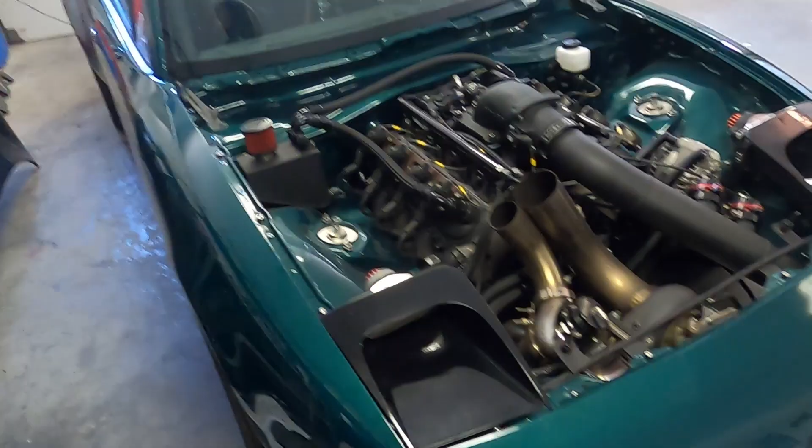You know, we made 25 hits on the dyno, made 3 passes at the track, and we found a few things that were flawed, but nonetheless, nothing that we can't fix. So I have a couple things on this I've written down. Got to fix the starter wire.

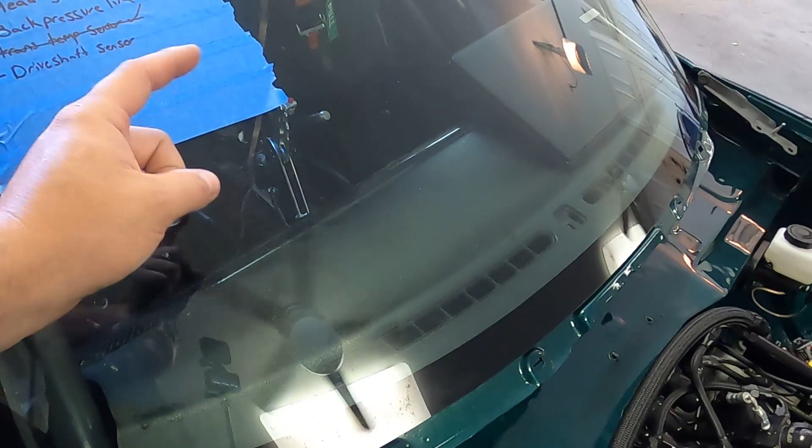I have a wire that goes from a switch panel into the shifter. The shifter only allows the starter signal to go through if the shifter's in park or neutral. That way it's a neutral safety switch. And then I have the wire that goes straight to the starter solenoid. Well, I think that wire is too small.

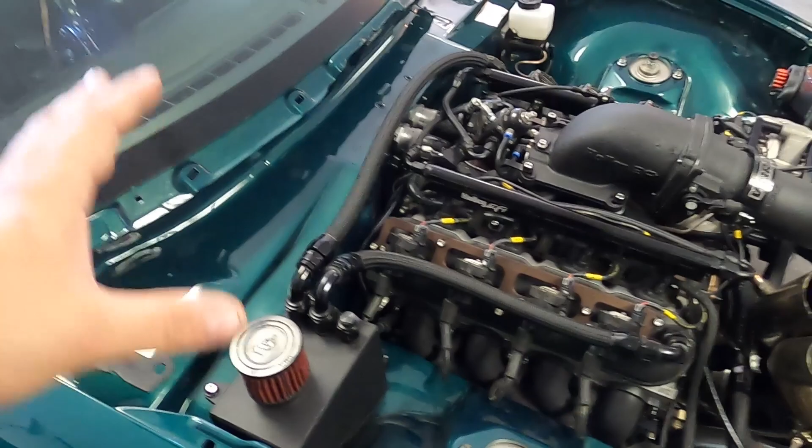So what I'm gonna do this weekend is we are going to take that wire, go into a relay, and then we're going to use a relay to send a stronger 12-volt signal to the starter. So that's that. The second one's head gaskets. I'll explain that in a minute.

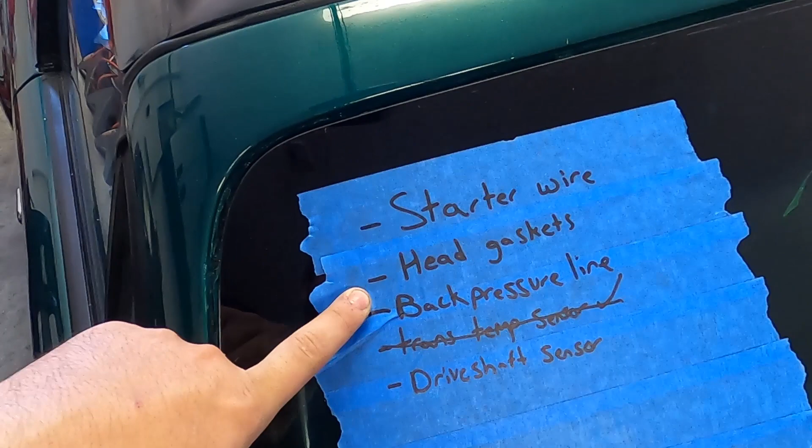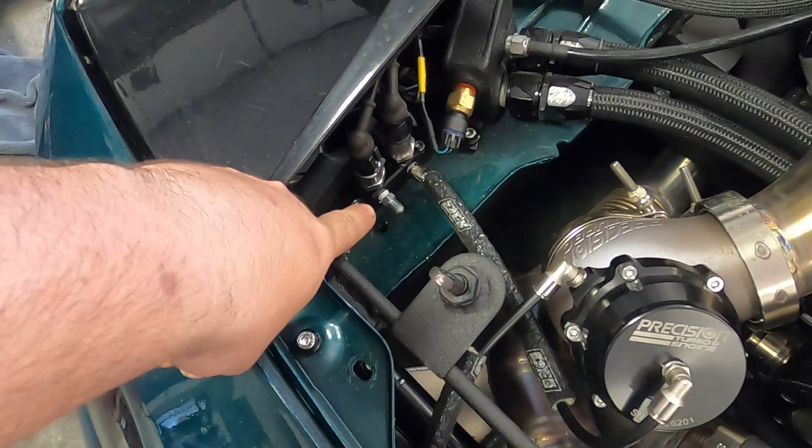The back pressure line, that's a funny one. I have it removed off the car now, but there's a line that goes to the hot side of the turbo. My dumbass made the line out of the copper nickel brake line I use, but I used an aluminum fitting. Not even thinking about it, I did it. On the dyno, I noticed it was a little wiggly. We go to the track, after the first pass, it was a little wiggly. After the second pass, the nut was gone.

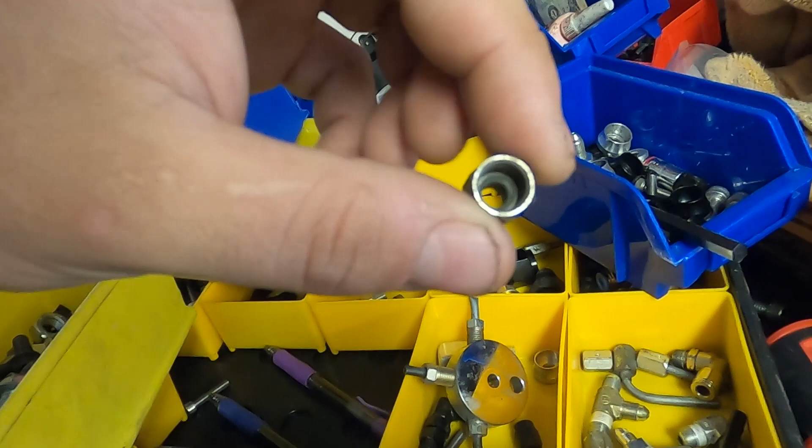I explained before how to make a brake line, but you have to have a flare sleeve and then a nut. I'll show you. Like here, this is what's called your tube sleeve. And then this is what's called your tube nut. So basically you have to have the nut around the sleeve, and you can see how it comes through the back there. Whenever this is tightened, the sleeve makes connection with your fitting.

Well, the nut was gone, like completely gone. It had melted, but the sleeve was still there. It was the most mind-boggling thing. I thought it was hilarious, but no worries. Apparently the copper nickel brake line didn't have any failure, so I'm just gonna remake that same line, just changing the fitting to a steel fitting. So that should alleviate that.

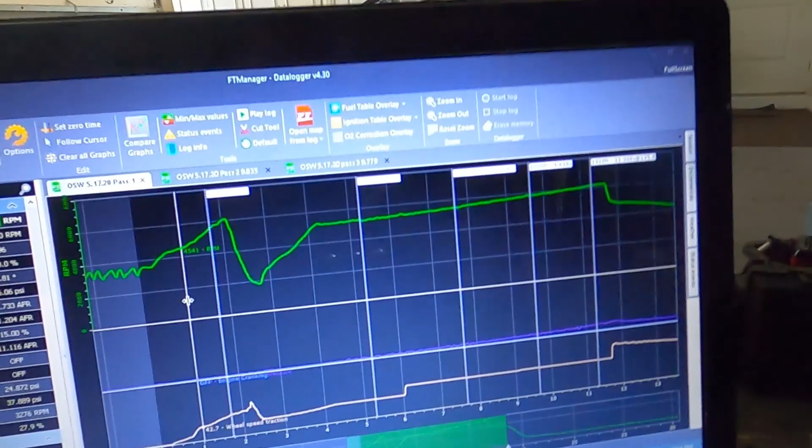I have marked on here trans-temp sensor. Well, come to find out, the homie Garrett at Fuel Tech told me that I just had the wrong calibration settings. So I adjusted that last night. I crossed it off my list.

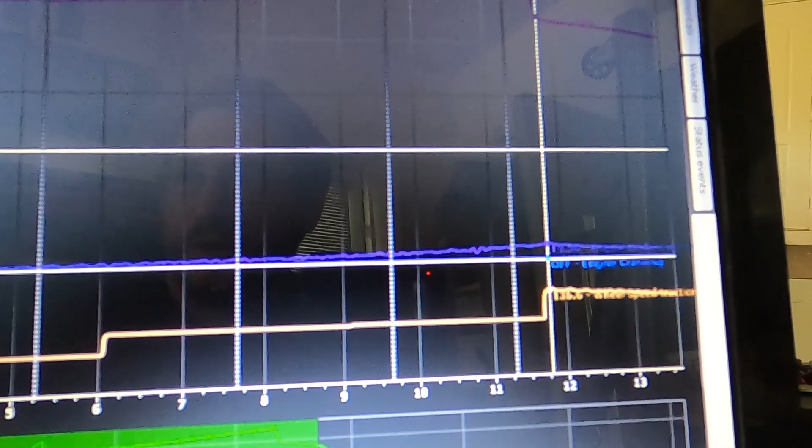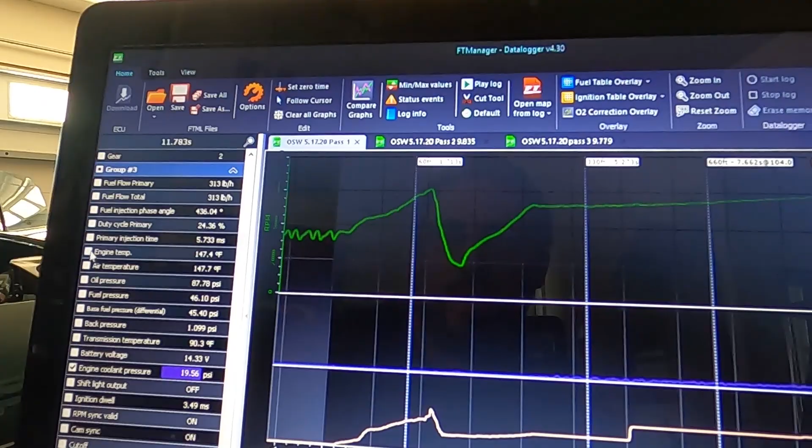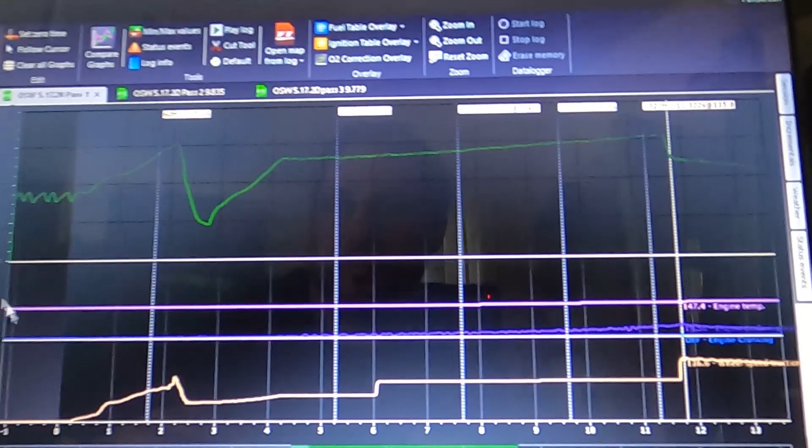Last but not least, drive shaft sensor. I did put a wheel speed sensor in the front right wheel, and I also have a drive shaft collar in the back of the car. Well, the ring is magnetic, and at the higher RPMs, or the higher frequency that it's spinning, it's actually getting a signal loss. So I need a different style trigger ring. I did order it. It should be here maybe this weekend. So I'm going to show you a couple data logs from the passes to explain why we need to dig further into more things this weekend.

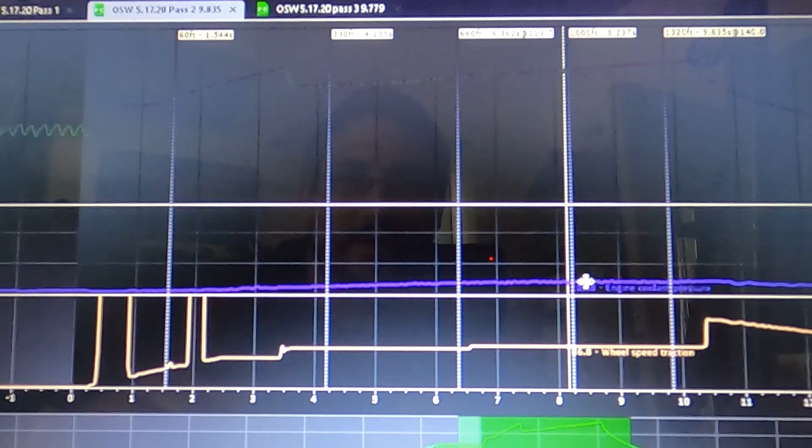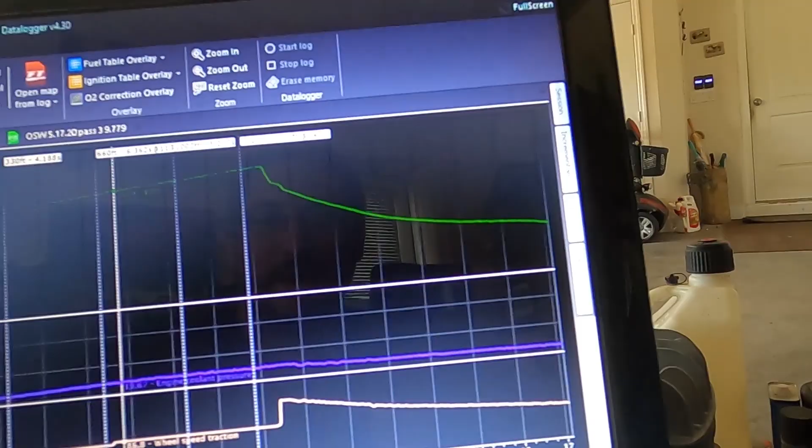Alrighty, so I got the Fuel Tech manager pulled up with the data logs from the 3 passes. I'm gonna explain this. I know not everyone wants to build a race car, but I cannot stress how comforting it is to have all the data in the world to actually look back and review everything. So I'm gonna show you 2 different parameters. This is a data log I'm looking at right now.

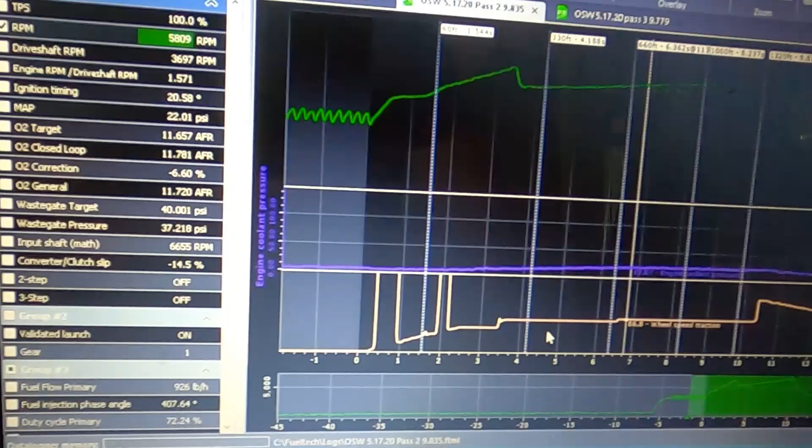Ooh, I gotta get you out of the, hold on one sec. Let's get you out of that glare.

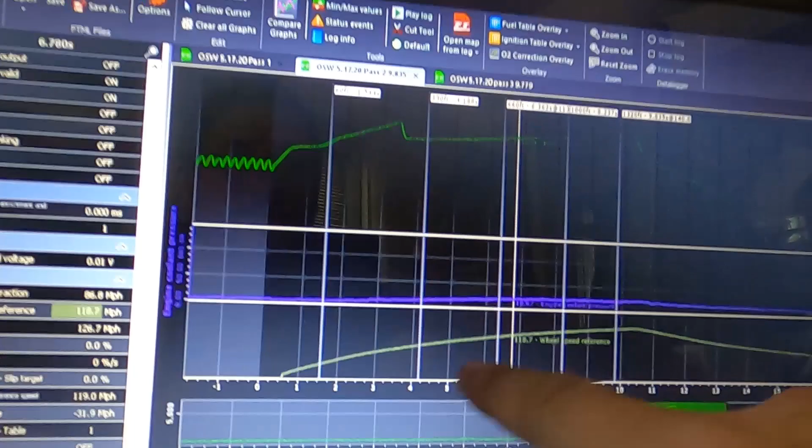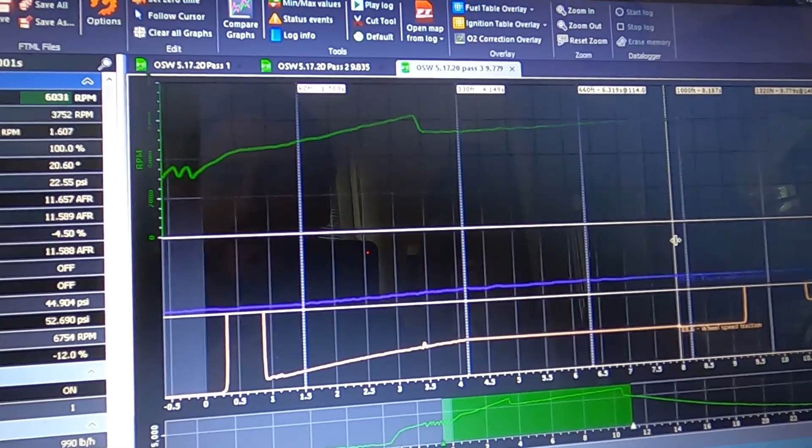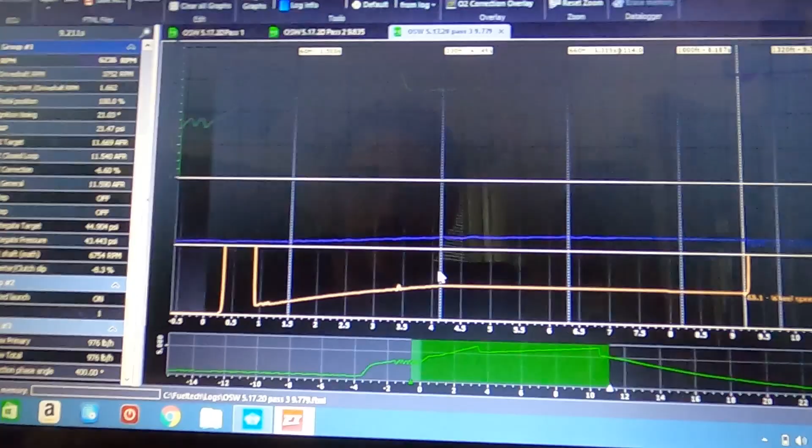Let's try over here. All right. Oh yeah, there's a lot less glare. Okay. So the green line here, squiggly guy up here top, that's RPM, just as a reference for me. I have this little purple blue line right here. That is going to be engine coolant pressure. So you can see there, squiggly guy. And then this bottom one is my drive shaft sensor.

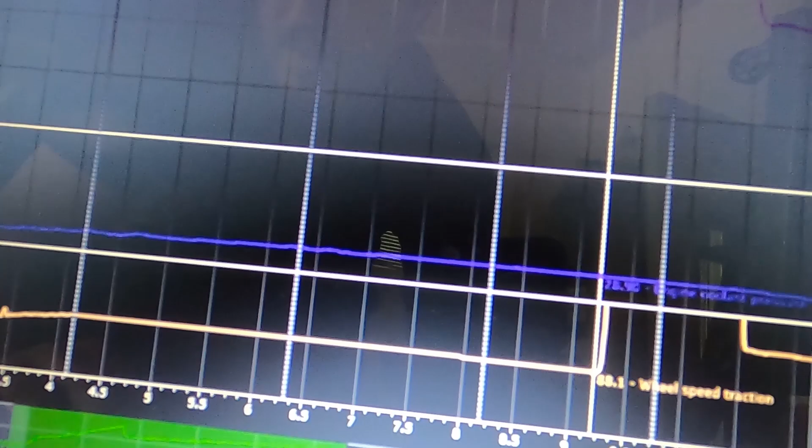So we already can see right here during the pass, you can see where it comes off the two-step. This is first gear. Second gear, it spins, it catches on the converter, and then it rides out second gear back out the back. So if we scroll through here, it looks like a peak coolant pressure of about 19.5 pounds, which is pretty high. So you can see during the run it increases.

Now, if we actually pull up engine temperature, you can see the engine temperature stays the same. So to me, that's telling me that something is forcing air into the cooling system. So that's bad. Now, if you look at this bottom squiggly, that's my drive shaft sensor. You can see here, it actually doesn't work. It goes here, it flatlines. I'm going to turn off that wheel speed, and I'm going to turn on the front wheel speed. Now on the front wheel speed, you can see how it just increases. So that's how it's supposed to be.

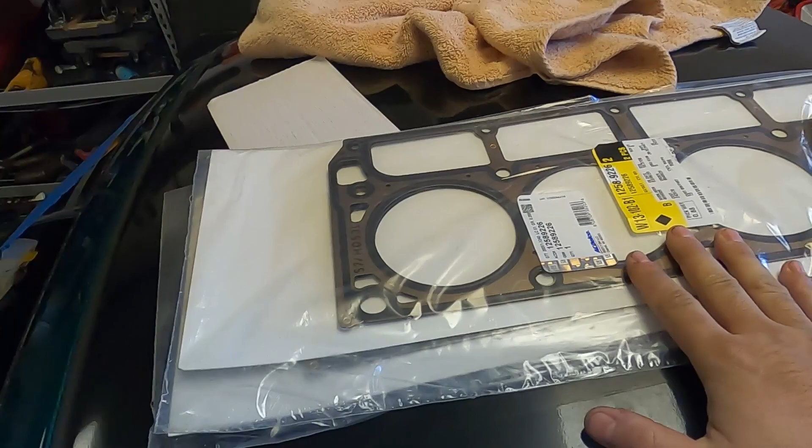Second pass, you got squiggly boys for the two-step. First gear, second gear out the back. Coolant pressure rises to about 21 pounds that pass, 22, 23 at the very end. Okay, so a little bit more than last pass. And you can see it increases, and then it'll actually decrease after the pass. So it is boost related.

Then you got at the bottom again the wheel speed traction. You can see that it actually rose here, it rose here. When the car actually made a good pass, the drive shaft sensor is all over the place. So again, I'm going to remove the rear traction and I'll replace it with front traction. And you see how it's a nice, steady line going up. So that tells me there's a false reading.

This is the last pass of the day. Coolant pressure peaks out around 29 pounds of coolant pressure up at the top. And then as far as wheel speed, you can see here, again, it cuts out before the 60 foot. And then at the very top end of the track, it just reads whatever. So let me go back down again. Let's replace that drive shaft with front wheel. And you can see the front wheel increases very nicely going down track. So I'm now learning the hard way.

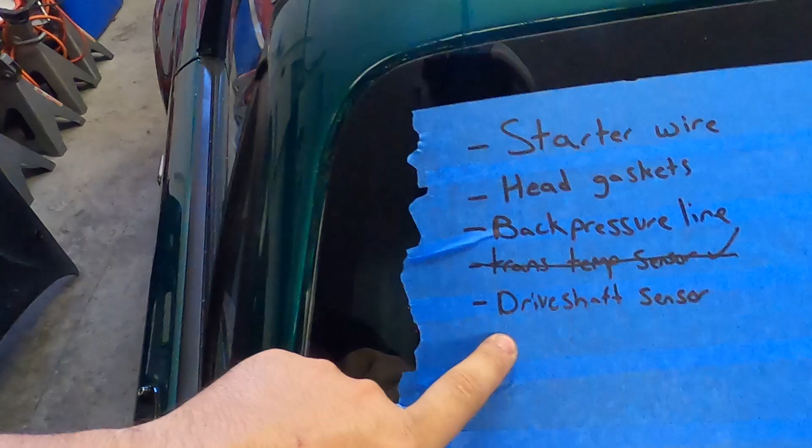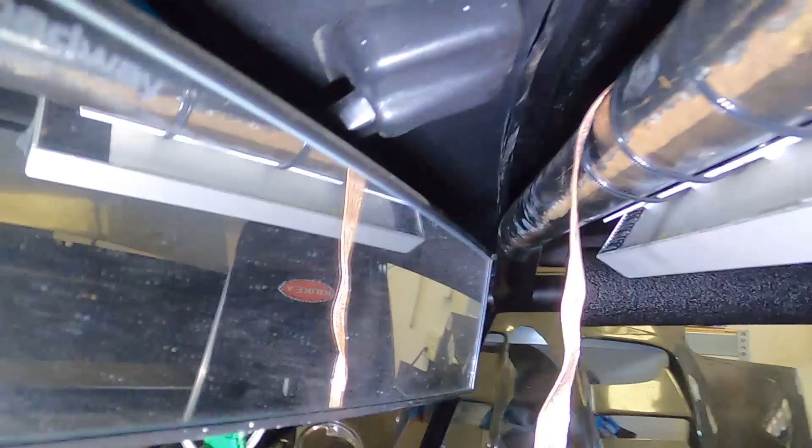So the pressure going into the coolant, I am 100% certain that's a head gasket. I kind of saw this coming. Brief explanation is I cheaped out on head studs. You see all these internet builds where this guy makes 1,000 horsepower on this, a guy makes 1,000 horsepower on that. Well, realistically, this car made 900 horsepower to the engine, and the Chinese head studs, they said goodbye. I know I have a different variable than others just because I do have significantly higher back pressure because of the small turbo. So that probably expedited the fact that I was gonna lift a head eventually.

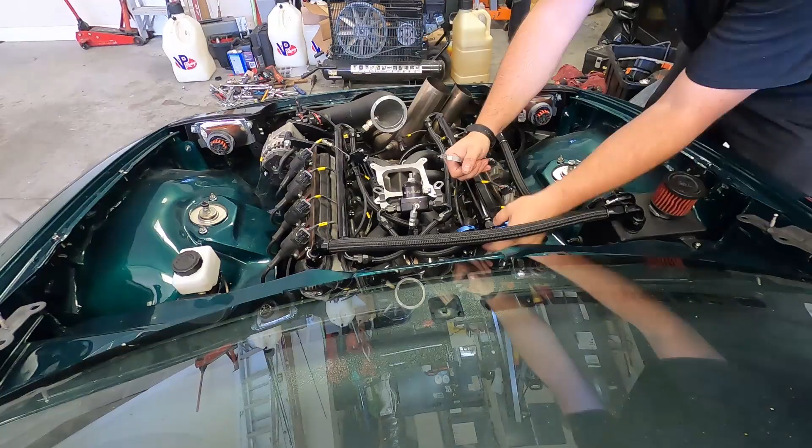So what I did is I went to the dealer, I got a pair of brand new 5.3 head gaskets, they're multi-layer steel, and I have a set of good ARP head studs on the way. So the plan now, we gotta take the heads off. Thursday, which is tomorrow, we are gonna get them surfaced at CW Pence, and then she'll be back together, hopefully this weekend. So like I said, the good data is good to have.

Now, not everyone needs a coolant pressure sensor, but I have a stock internal LS with boost. So I kind of know if I have excessive coolant pressure, the head's gonna lift. I'd rather data log it and set a safety alert before any major failures. Because in the FuelTech, I can actually make it so if coolant pressure reaches, let's say 25 PSI, it'll cut power to the engine to prevent it from lifting a head more or even pushing the gasket to where I can get hurt because the water will get on the tires as I crash the car. So that's why I do it.

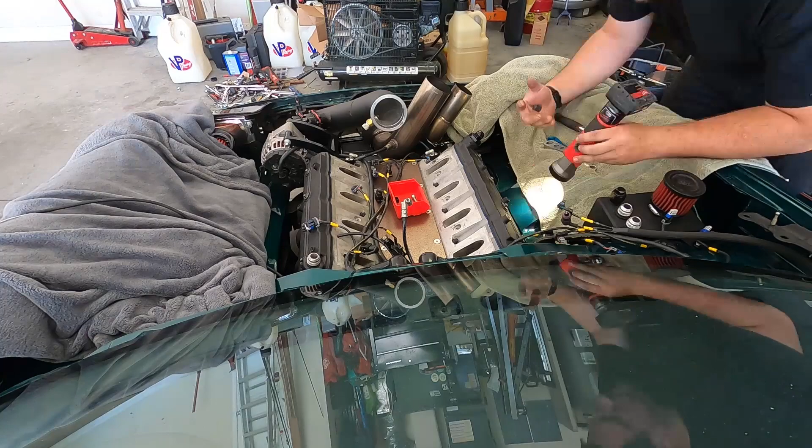I mean, the sensors aren't all that expensive, but you do have to have the computer that can read and interpolate all the sensors. As far as the drive shaft sensor, the only thing I have to change is the collar. The one I have on it now is a 4 magnet, and I have to buy a collar that has like high and low spots. So I did order that from Motion Raceworks. I think it ships out today.

So I'll have it before next weekend for sure. So I will explain that when I get that. So in the meantime, I'm leaving that not checked off because I still haven't physically received it, but trans temp's been fixed. So this is my list I got to quickly start working on.

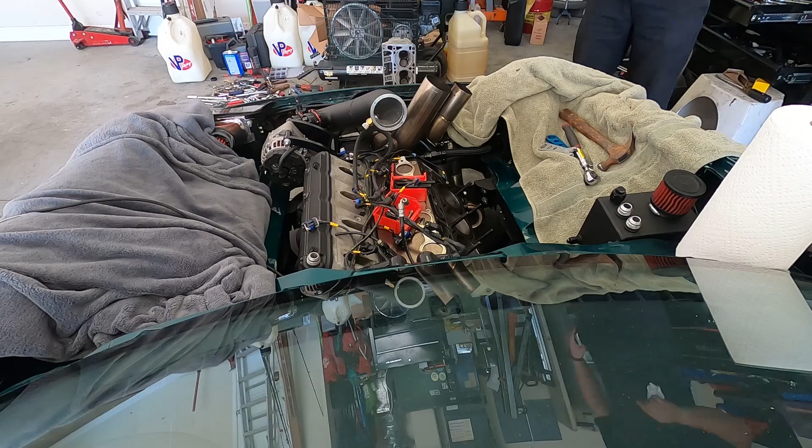And then one other thing that I'm super happy about is I finally got my damn bracket in for my switch panel, my ARC one. If you watch the video of me going down the track, you can see me fumbling with this thing, trying to shut it off. So it's actually a bracket that I can zip tie to the cage. So that makes my life so much easier. So anyway, I'm gonna get to start working as much as I can before I gotta go to work. I'm gonna start trying to pull these heads off.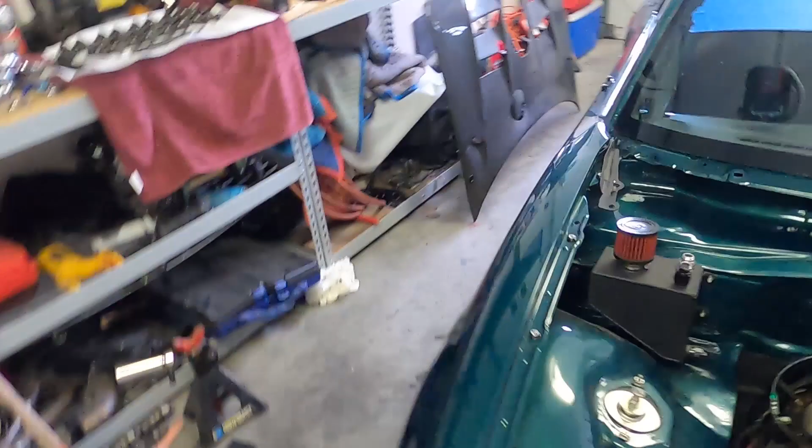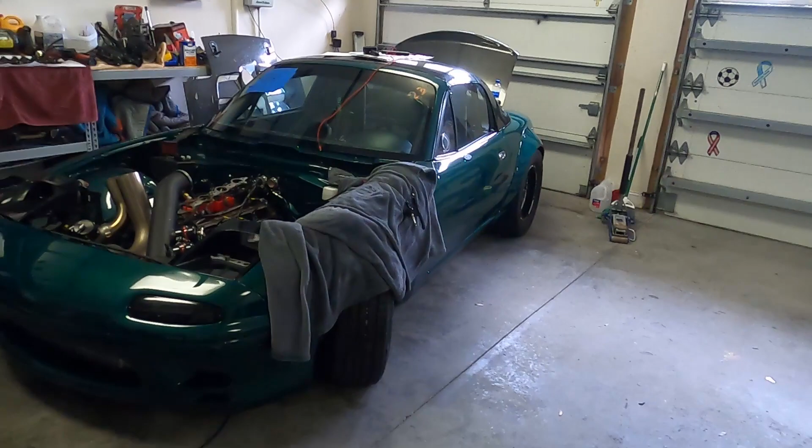Alrighty, so finally got both the heads off. As you can see here, the gaskets are off. I checked the gaskets and I'm checking the surfaces, and I'm not really seeing anything that's out of the ordinary. You would usually be able to see where compression's going in, but you can see there's a very definitive ring around all of the cylinders. So I'm thinking what could have happened is, actually no, maybe that could be right there. That kind of looks a little less definitive.

But yeah, the other thing that could happen, because these are multi-layered gaskets, the compression could actually go between the layers of the gasket and get into the coolant. So either way, nothing looks really bad, and it's cool because everything in here looks beautiful still. I don't see any issues. No weird marks, no scoring. So that is definitely good news.

So I'm taking these to CW Pence tomorrow. I'm going to have them surfaced. My head studs arrived from Summit. And then as you can see here, I already have my new factory 5.3 gaskets. So all will be good. So this will be back together hopefully tomorrow night or the night after.

So I just had a very, very fun couple hours. I struggled real hard at pulling the head gasket off with the studs. So I took an Allen wrench, and I was starting to try to pull the stud. I twisted as hard as I could to get the Allen to come loose. And I straight up sliced the ever-living crap out of my finger with the edge of the head gasket, to where I just went to the hospital and got 3 stitches. So that's how my day's going.